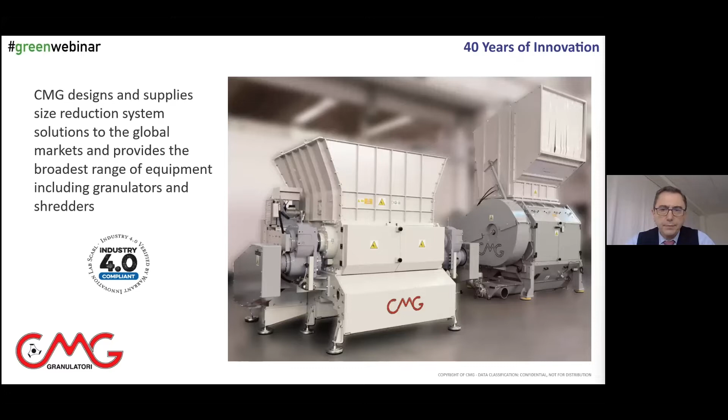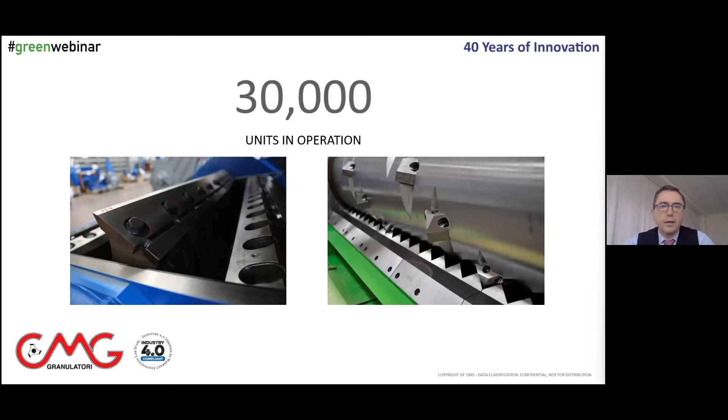In 43 years of activity, we've been installing much equipment, and today 30,000 units are in operation. Obviously, 43 years is a long time, and what we supplied to our customers 43 years ago is very likely not in operation anymore. So what I'd like to display in this slide is the amount of equipment that is today contributing to achieving the objective of recycling the most possible post-industrial and post-consumer plastics.

CMG operates in 6 specific application sectors. The majority are plastics related: thermoforming, predominantly for the packaging industry; extrusion, where we are still in the packaging industry, but also in building and construction; blow molding for all types of containers; injection molding, particularly for highly technological applications where hot runners cannot be utilized and the polymer in use is of very high value, so there are runners made of highly valuable polymers, and customers want to recover them.

Then recycling. Recycling is recycling of plastics, but recycling in general of many different materials. And recycling is predominantly post-consumer recycling, but also post-industrial recycling. In the recycling sector, one very specific sector for which we produce purpose-designed equipment is cables recycling. Cables carry a very high value because they're made with copper, and copper is a metal that carries a high value.

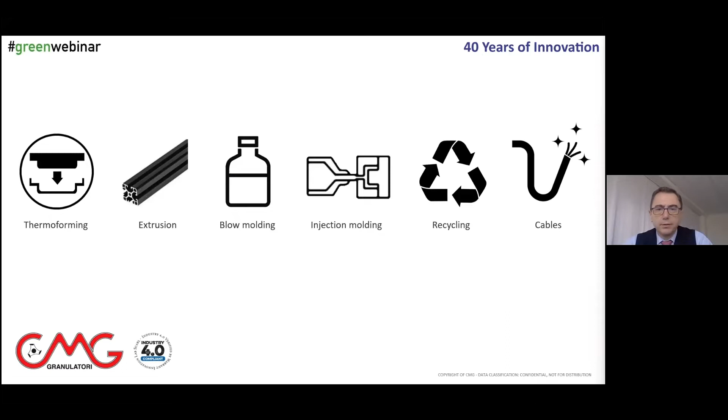Now, let's get into the subject of circular economy. So circular economy centric recycling solutions. Why circular economy centric recycling solutions?

Because recycling solutions today have been in place and in operation for many years, we do not only have customers with new recycling systems, but also customers that have recycling systems that have been in place for a long time. So what is it that we supply today? What is it that we are offering today?

Before going into that subject, let me review briefly with you what circular economy is. The best graphical representation that I found for circular economy is this, which is very simple. It's divided into 3 sectors: consumption and use, recycling and reuse, and manufacturing.

If we look specifically at what circular economy means, starting from the top right: use less, to minimize waste. Now, use less is very important, and it is by no chance that it is the first element of this circle. Use less. Collect and sort waste, stuff that we've been doing for a long time, and that we are improving.

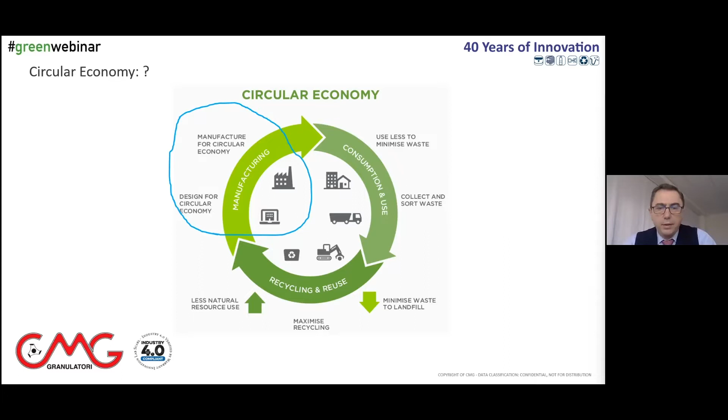Having said all of this, let's get to the technological section of the circular economy, which is design for circular economy and manufactured for circular economy. This is the area where we operate, we as OEMs, suppliers of equipment.

So how do we design for circular economy? How do we manufacture for circular economy? At the end of the day, circular economy is a concept, it's something that has not been part of our lives for such a long time.

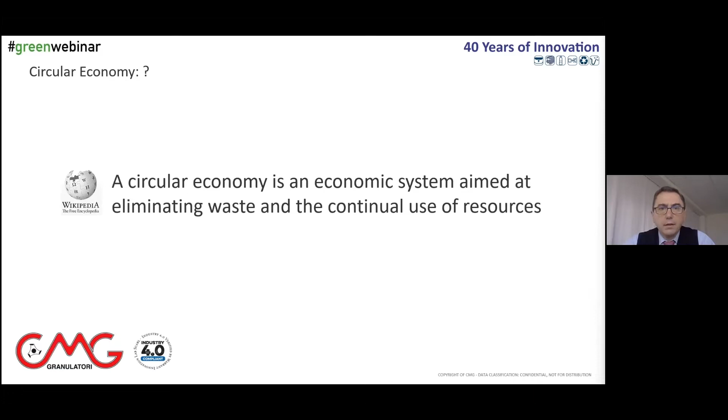If we go and check circular economy in Wikipedia, we will see that it says it's an economic system aimed at eliminating waste and the continual use of resources. So it's very concise, very clear what circular economy is, conceptually speaking.

In 2013, the Ellen MacArthur Foundation released a report which was the first of its kind. 2013, so 9 years ago, titled 'Towards Circular Economy: Economic and Business Rationale for an Accelerated Transition.' So we're speaking of transition to what? Transition to going from what we have heard so much in recent times, from a linear to a circular economy.

This was 2013. In 2018, 5 years after, the World Economic Forum, the United Nations, and other finance, politics, and public-private contributors put together a platform for, again, accelerating circular economy. So the transition to circular economy, this was 2018. So we're getting very, very close to modern times.

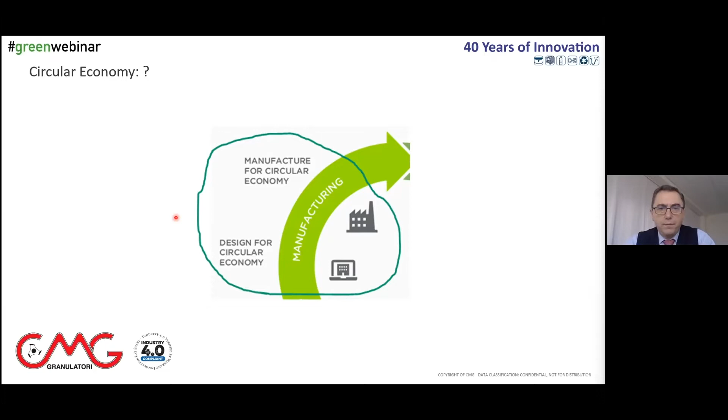And in 2018, the same year, the ISO, the International Standardization Organization that we all know, established a technical committee for circular economy, TC 323. So what happened? What has happened from 2018 to today, in particular, what has happened to the technologies? What is it that companies like us, technology providers, solutions providers, have done?

Well, when it comes to CMG, what we have developed is a very, very new, innovative, and unique control for our equipment that we have called AMP, the Adaptive Motor Power. Now, what is the AMP?

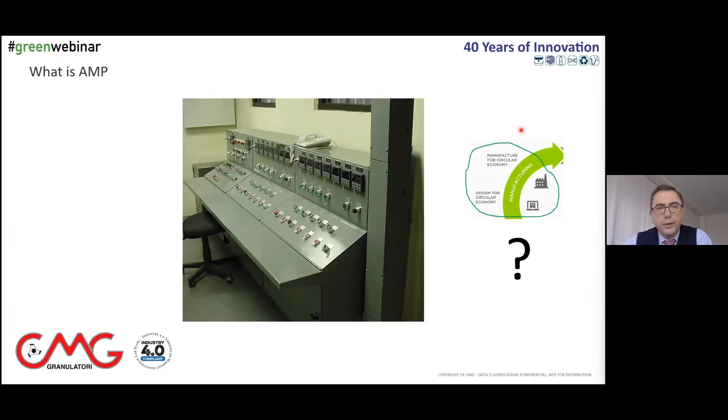Now, when we switch to today, we may be offered with something like this. We do not really need controls of this category. I mean, we are not in an industry that requires this type of controls.

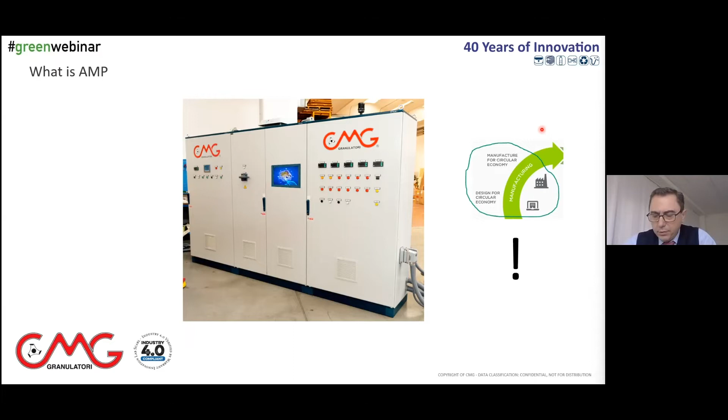What we have done as CMG is we have designed controls that can help the industry transition to manufacturing for circular economy. So our AMP is a control associated with a new generation of equipment that is able to optimize to the highest possible level the operations of the equipment, and in particular the grinding of plastic into smaller particles so that those particles can be recycled.

So what are the features and what's the performance of the AMP.

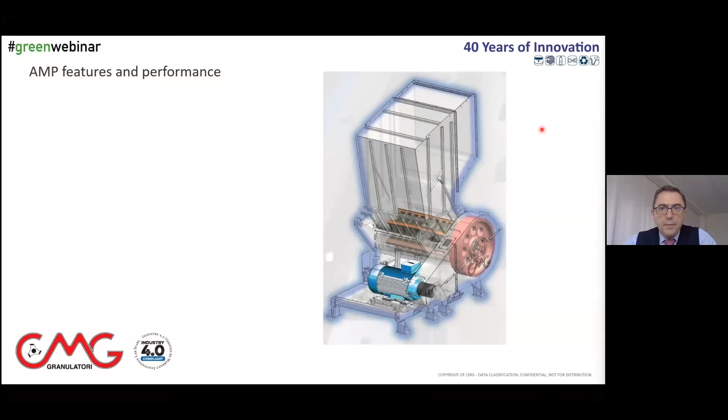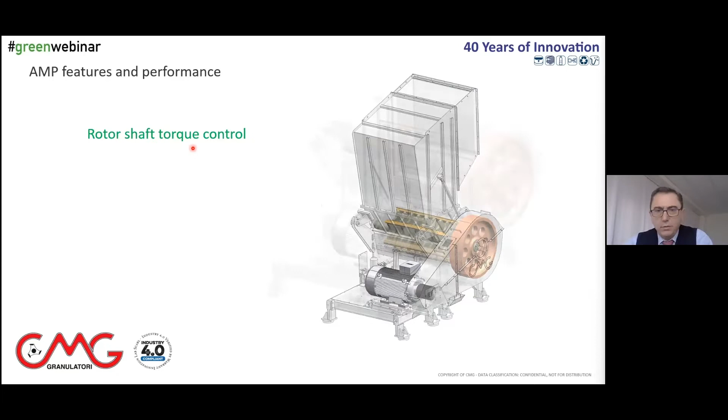So the AMP is a control applicable to granulators, and the first control that it performs is the rotor shaft torque control. What's the rotor shaft? The rotor shaft is this. This is the rotor where the grinding takes place, and this is the shaft. The shaft gives the motion to the rotor, and this is the pulley for the rotor. So what the AMP does is control the torque applied to the rotor shaft.

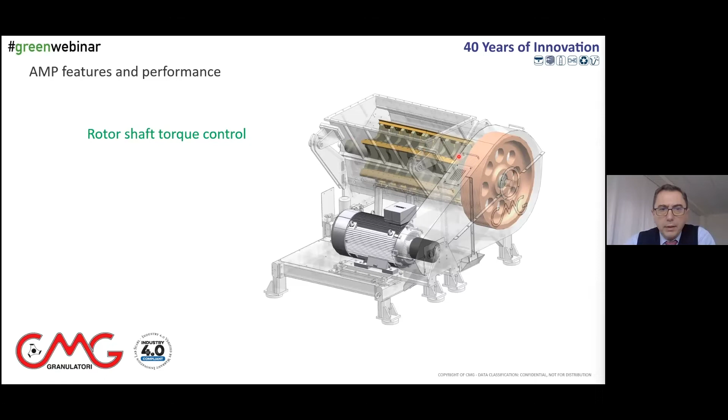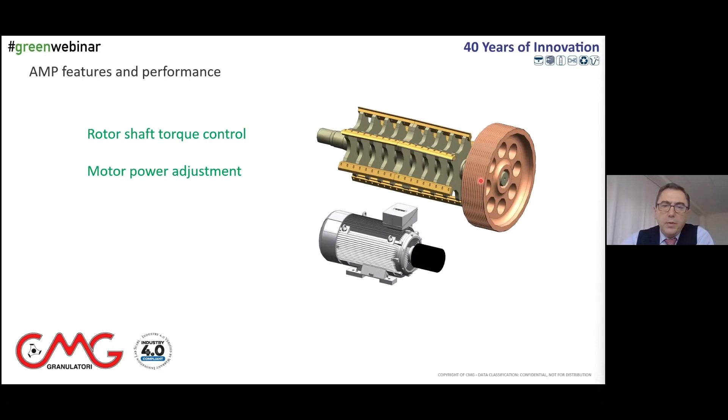Why does it do that? Because by doing that, we understand exactly what's the load on the rotor, and therefore we adjust the motor power. Why is that important? Because when it comes to grinding plastics, we see a variety of materials that change the conditions of operation of a granulator. So we can have big pieces of plastic, small pieces of plastic, thick or thin parts, warm or cold parts, lots of plastic or very little plastic. So very, very many variables that by controlling the granulator and by appreciating the rotor shaft torque applied, we can turn all those variables into parameters and control them.

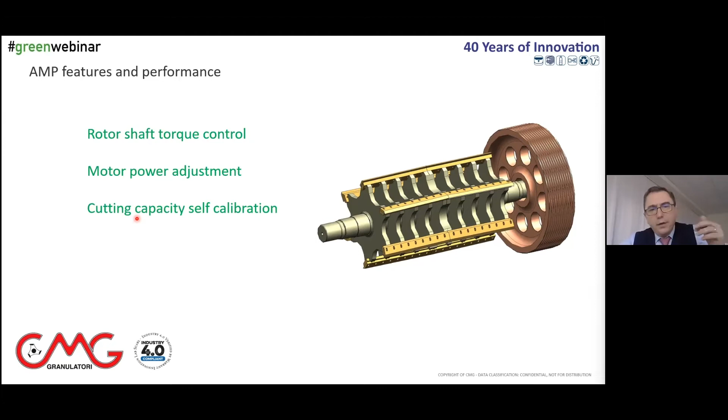And on top of controlling them, also calibrate the cutting capacity. So when we have little to grind, we can calibrate and provide small power. When we have big to grind, we can calibrate and provide large power.

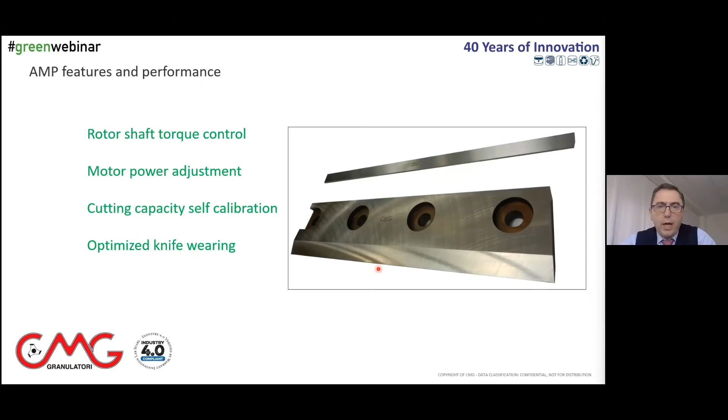Optimize knife wearing. In particular, post-consumer recycling has a high degree of utilization of the blades, and therefore the blades for post-consumer recycling in the granulator might require sharpening or maintenance once a week, even less, maybe once every 4 to 5 days. By optimizing knife wearing, we can go from 1 week to 2 weeks, or from 4 to 5 days to 8 to 10 days. So a very big advantage to the operator.

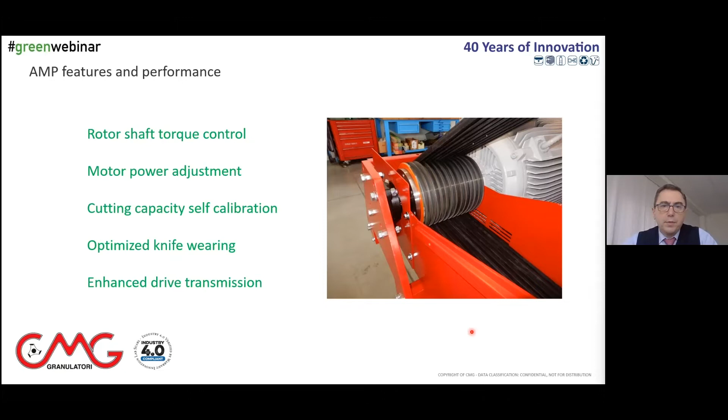And an enhanced drive transmission. That's important because a granulator that operates by varying the conditions of operation requires some specifically designed transmission. What are the advantages and the benefits of the AMP?

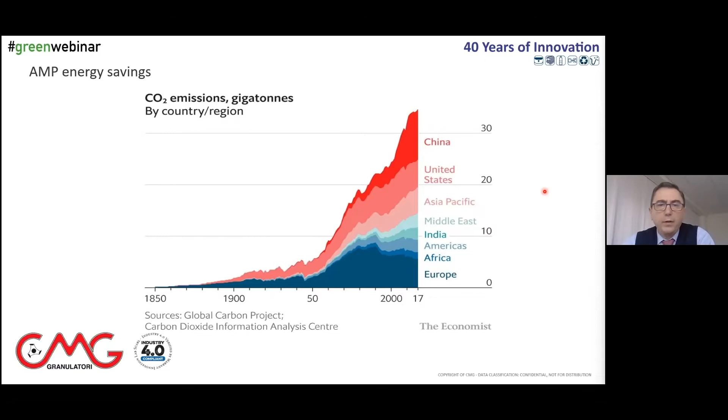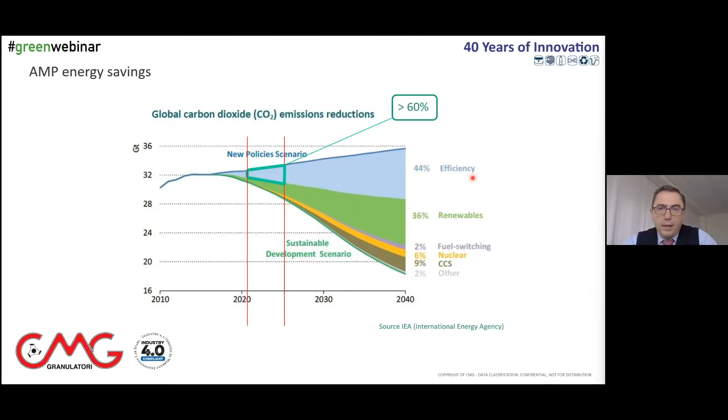This is from the International Energy Agency, where we see that by optimizing energy utilization and energy production, we will reduce global CO2 emissions. From the end of 2021 to 2025, as you can appreciate, the reduction of CO2 emissions will be by more than 60%, represented by improving the efficiency of the equipment. And energy utilization - 50% of the energy utilization in the world is used by electric motors. So imagine by applying advanced control to electric motors, what we can obtain.

In conclusion, if we look at a granulator workload, we see that a granulator can work in a constant manner, in a cyclical manner, and in a variable manner. What does that mean? That if we have to pick the grinding capacity of the granulator, we have to consider those conditions of operation, the highest of the demand, and put some extra power to the granulator, so to be sure that we can cope with the request, with the workload.

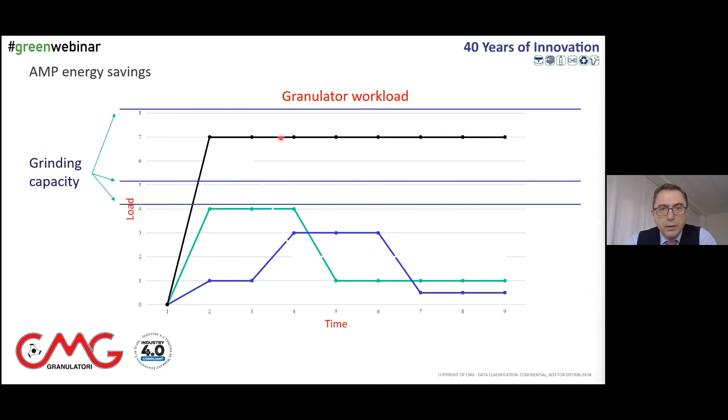But if we look at it in particular, we'll see a constant workload condition, with a granulator having this capacity, the blue line. We have this area in the red box, which is the extra capacity. And the extra capacity equals extra energy utilized by the granulator that was not necessary.

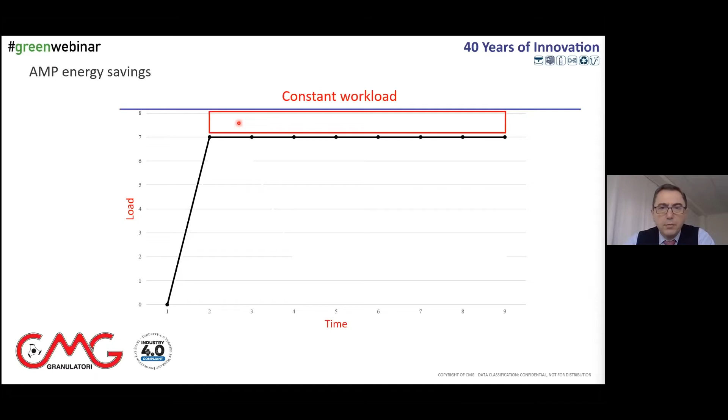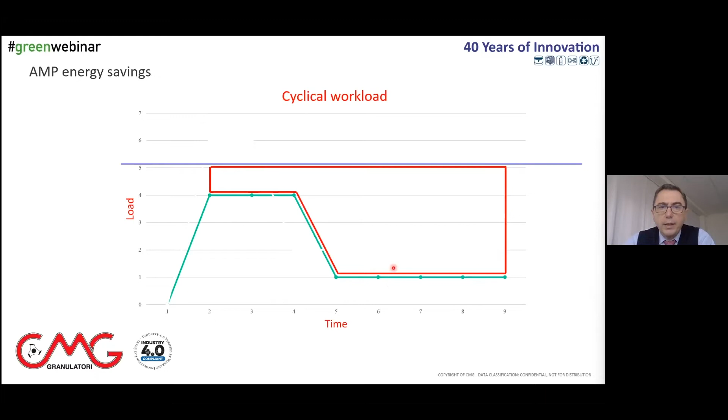In a cyclical workload, same thing. This is the capacity of the granulator. This is what's required of the granulator. And in the red box, we see how much extra capacity the granulator has. Not to talk about variable workload, which is the worst of the conditions.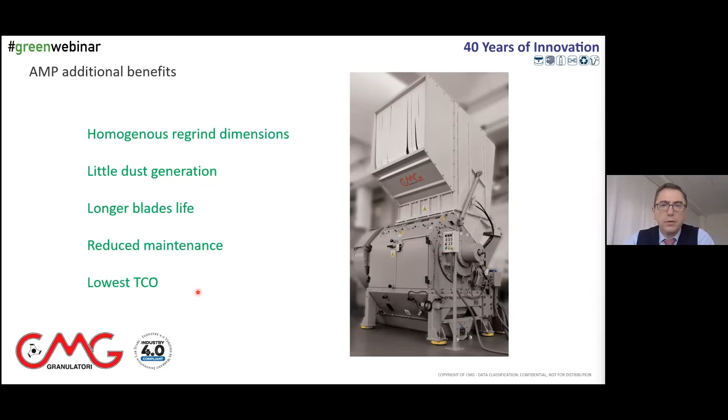So very, very rapid. And associated advantages to the energy utilization optimization are all of these: homogeneous regrind dimensions, little dust generation, longer blade lives, reduced maintenance, and the lowest total cost of ownership, of course. I thank you very much for your attention, and if there are any questions, I will be happy to answer.

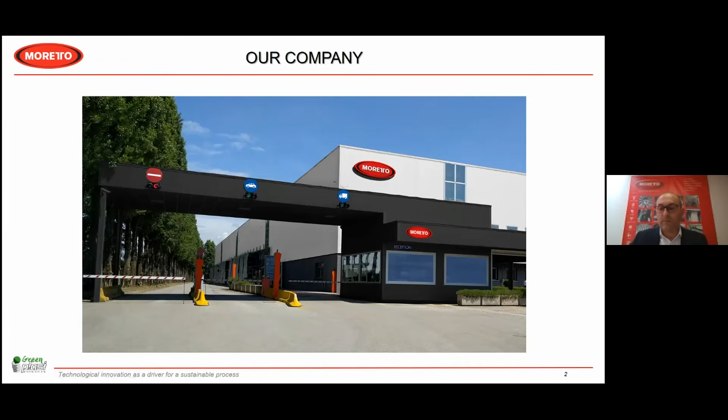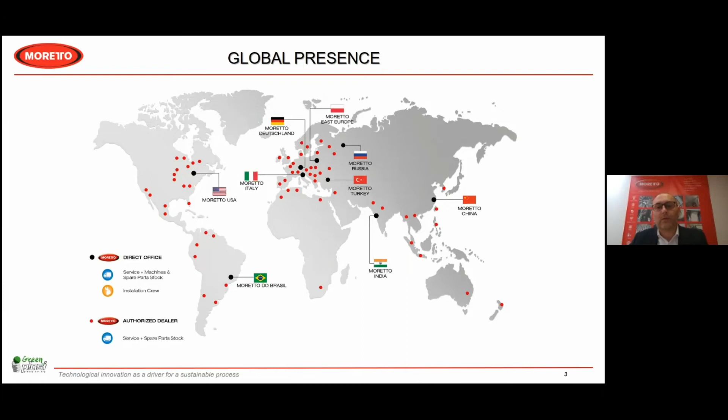An overview of Moretto's presence in the world: we are present with 8 direct offices and more than 70 distributors or dealers that are able to supply services in line with our standards, equipped with automatic warehouses for spare parts in order to assure immediate shipment and provide the same high level and quality of service to our customers.

Regarding technology and solutions, our commitment consists in providing a product deeply interconnected with the business processes, which is very important these days. Connectivity now is essential and needs to be implemented and improved every single day. Currently, almost all our systems and products are in line with smart factory requirements, a need for today's connected world where performance needs to be measured and continuously monitored.

Our MOVI supervising system is a software developed in-house, designed to manage the whole production process. Thanks to the new OPC UA technology for connection and protocol, it can connect to any network and any process of the customer.

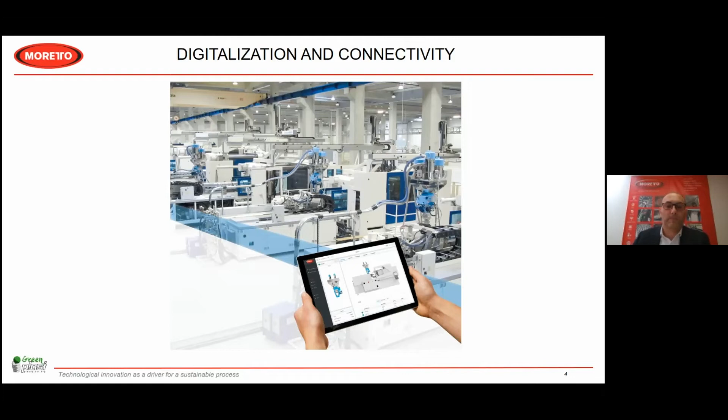As regards the webinar topic, speaking about recycling technologies, today the market is very demanding in terms of skill and services. Processors are more and more looking for advanced equipment able to work with high percentages of recycled materials. Global regulations are also pushing for an increase in the use of recycled materials and their enhancement. For example, European legislation requires that by 2030, packaging must contain 30% recycled material.

There are also events like the one organized by Hera Group promoting artistic projects called SCART, which transform industrial waste into artwork. In this regard, it is essential to develop and implement solutions that make it possible to reduce the use of exhaustible resources.

Flexible solutions are needed for recovery of recycled material. Moretto offers automation for granulation, storage, conveying, dosing, blending, and drying of post-consumer plastic materials.

If we look at 2020, more or less 29 to 30 million tons of post-consumer plastic waste was collected by European countries, including Norway, Switzerland, and the UK.

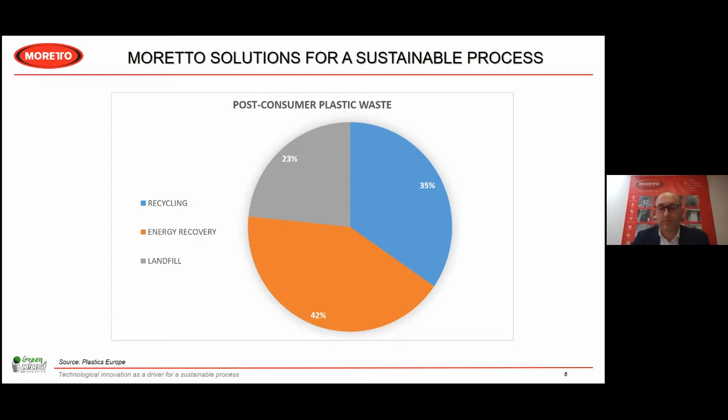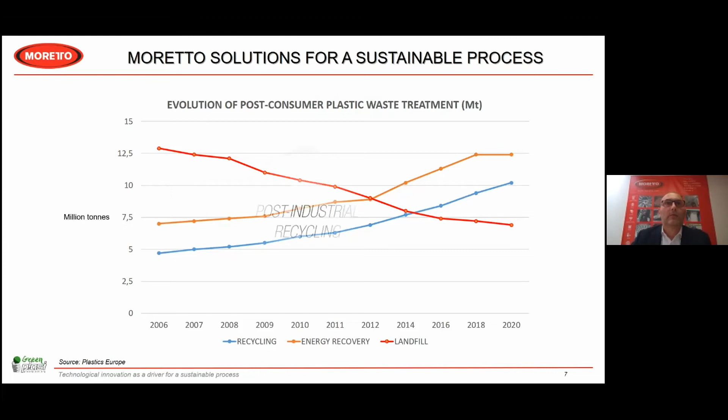As a consequence, the plastic waste destined to landfill has been reduced from around 12.5 million tons down to 7.5 million tons. So it is clear that in the plastic sector, post-industrial recycled material has the opportunity to be transformed into new products.

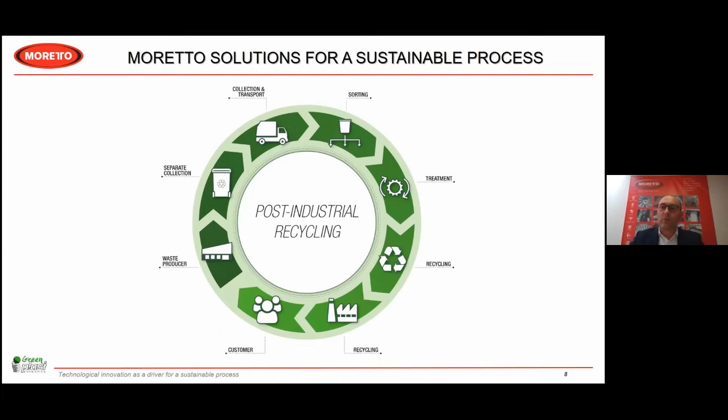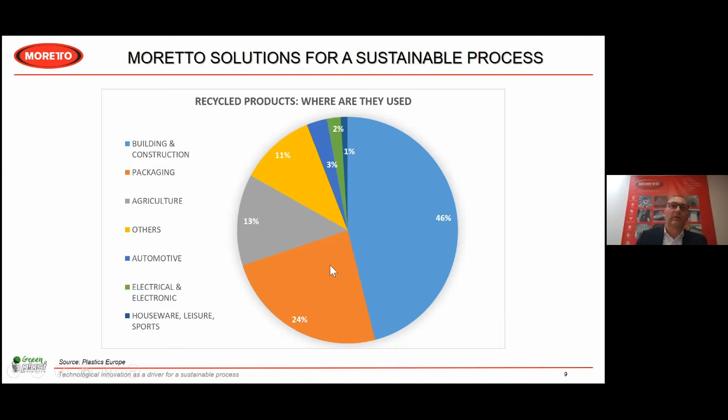So I was saying the post-consumer plastics can be transformed into a wide variety of new components for a new life. Looking at that, we can see that the most common use of the plastic recycled material is building and construction. Then we see packaging, agriculture, and then automotive, electrical, electronic, leisure, and sports.

So let's introduce Moretto products that can help on the recycling. The solutions that contribute to the correct and effective treatment of the recycled material in each step of the process.

Size reduction and grinding of material coming from the post-industrial sorting is the first step. So we have the Eco Series granulators that are built for heavy use and with generous load capacity. They are suitable for use in the waste recovery department, centralized department, and consist of a rotor with multi-blades, cutting scissors, and are equipped with the latest generation of motors.

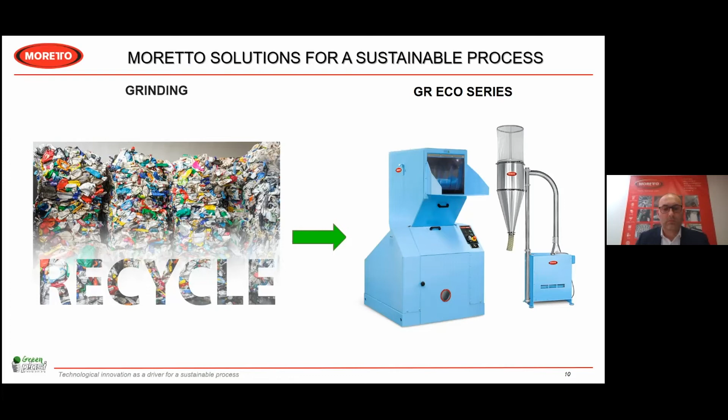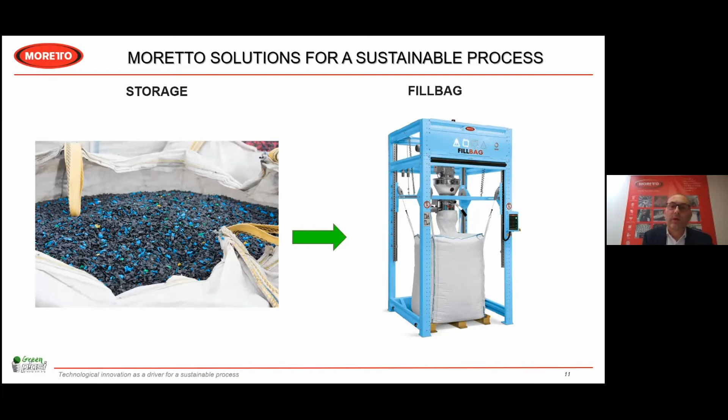Then the pellets, the regrind material, the flakes need to be packed and transferred to the plastic processing plants. So the Fill Bag enables the automatic filling of big bags with bulk materials. Fill Bag is easy to use, performs very simply, and is quick for the filling operation.

Again, material needs to be conveyed to the final machinery. Material conveying is a very important phase. So vacuum units and self-vacuum cleaning filters guarantee transfer of large quantities of flakes, dusty grind, and repelletized material coming from the shredding or the extruders. The Vortex effect protects the filters with a first centrifugal separation, and these solutions are designed for hard, heavy work, and are modular in order to be ready to satisfy any type of application.

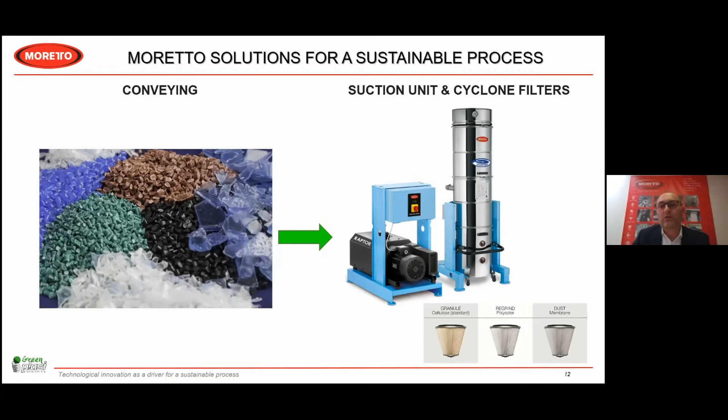In the following slides, I will present some Moretto solutions for the blending and dosing of any kind of recipes, including any type of material. So Gravix, the one that we see in the picture now, is a batch gravimetric blender which is capable of blending flakes, dusty grinds, granules, microgranules, and powder. The DGM Gravix has been specifically designed for the treatment of bottle flakes, rPET, and in the PET sectors.

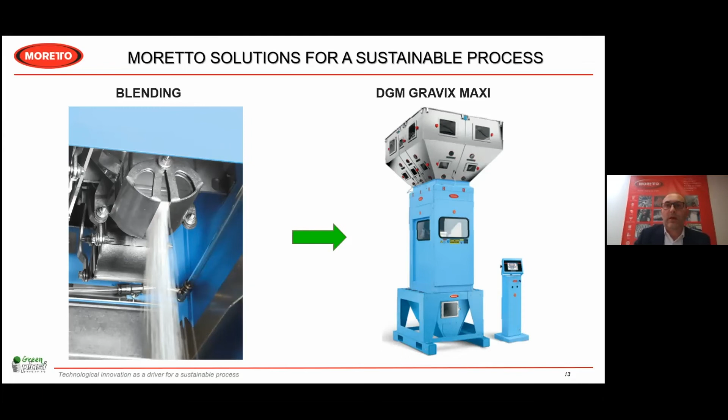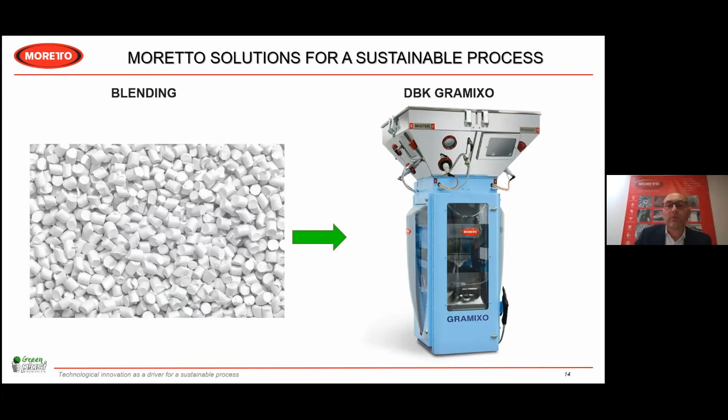The next one, Gramixo, is a continuous loss-in-weight batch blender that manages the extruder to ensure the constant weight per meter ratio. It is suitable for the use of regenerated raw materials. And the last one, Graviko, is a multi-component loss-in-weight gravimetric blender. Actually, it is a feeder with automatic weight-per-meter adjustment, capable of processing dosing recipes where the raw material used can have different granulometry and different specific weight.

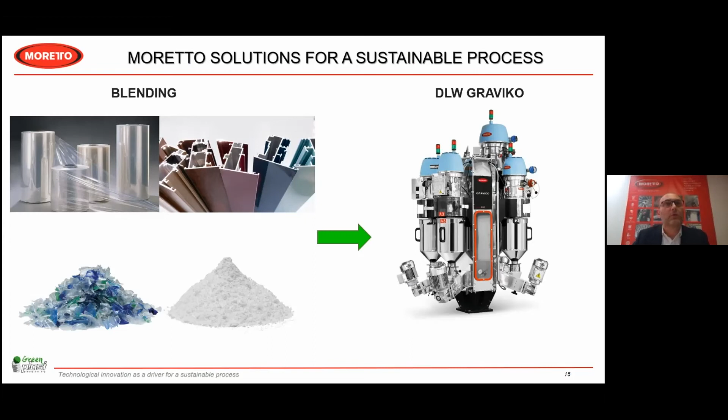At the end, let's say an essential element in the treatment of PET is the crystallization. It's a dedicated process for regenerating flakes and amorphous material that comes from post-consumer waste. Moretto's MPK crystallizer is a system designed to convert amorphous material into crystalline state in order to be processed at the same time. MPK is easy to use thanks to its central control panel, allowing control of each single phase of this crystallization.

And it is easy to use for cleaning, because that is a fundamental feature for this kind of application that processes post-consumer material, especially to limit production change-over time during the cleaning operation. So the drop-down cone, as we can see on the right side, assisted with a device, allows for complete access to the internal components of the crystallizer for a deep cleaning.

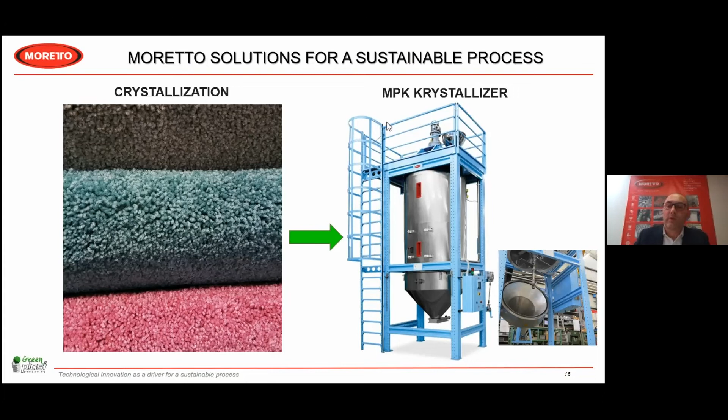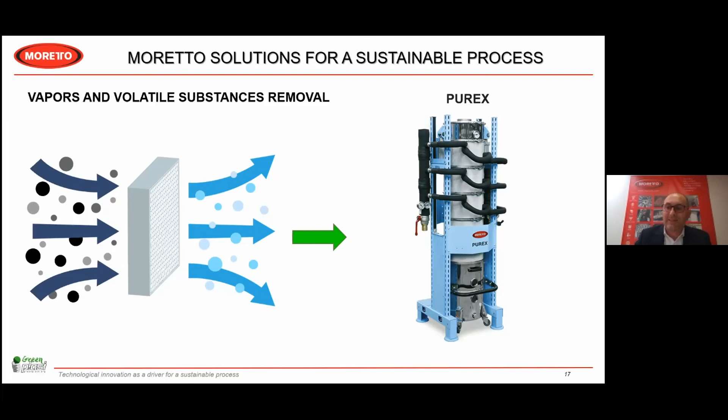Another very important step during the crystallization and also the drying of the material is the Purex. Purex is a condensate separator that is going to reduce the volatile substances and vapors trapped in the material, removing all the contaminants released by the material itself. And so it is keeping the dry air clean. Filtration is made possible by a cyclone, as well as a series of condensation rings that capture most of the volatile substance. Purex is very important, as I told you, for the crystallizer and drying phases.

And after the crystallization and filtering, the drying, all the crystallized material needs to be dried. So Xmax is an on-demand drying system with self-adaptive technology that optimizes process operation and reduces energy consumption. It adapts automatically to the production need, thanks to the variable airflow that guarantees the correct supply of dry air.

It is completely modular, so it is a system that can grow with the need, with the company. From a basic system consisting of 3 modules, it can be expanded to 10 modules, covering a dehumidification need up to 12,000 kg per hour. It is also a one-power system that does not require compressed air or cooling water. As well as the other equipment, Xmax can be connected to MOWIS, our supervising system, and can connect to any network of the customer.

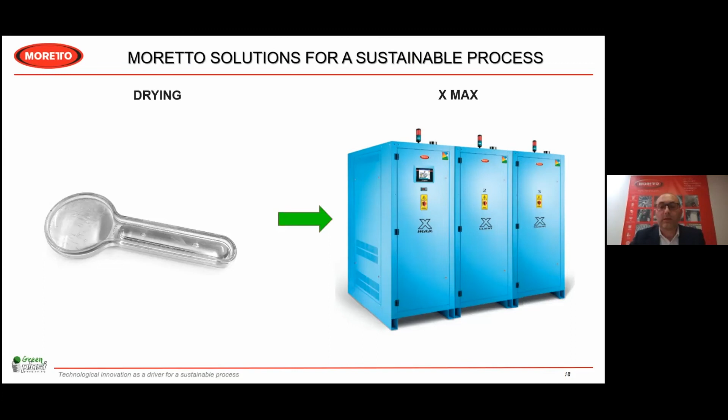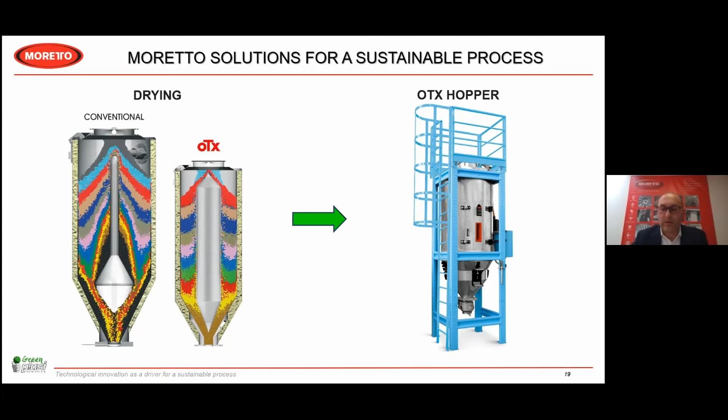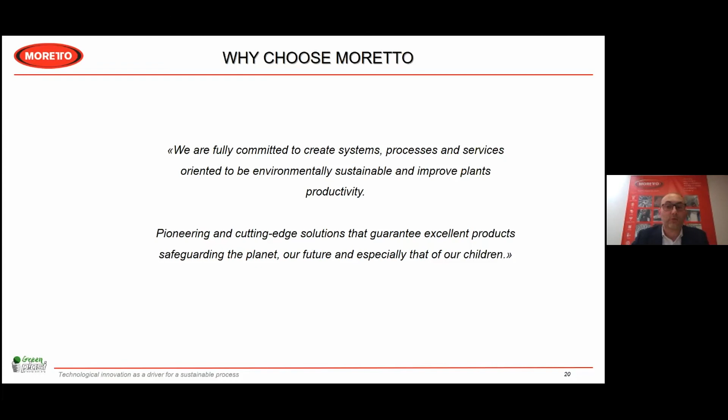So, just concluding, we are fully committed to create systems, processes, and services oriented to be environmentally sustainable and improve plant productivity, pioneering and cutting-edge solutions that guarantee excellent products, safeguarding the planet, our future, and especially that of our children.